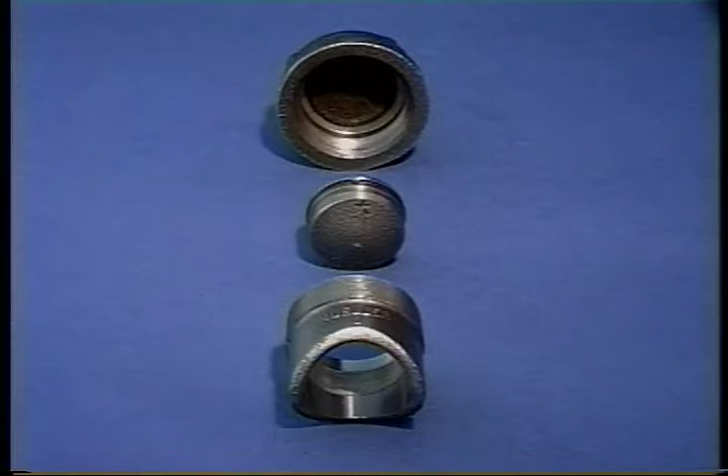This fitting consists of the one-piece forged steel body, plus an O-ring sealed completion plug and a cast iron completion cap. The H-17190 fitting is available in 6 sizes: 3/4 inch, 1 inch, 1 1/4 inch, 2 inch, 3 inch, and 4 inch. All sizes are rated at 250 psi maximum working pressure, except for the mechanical joint style, which is rated at 125. During the stopping off operation, all sizes are rated at 100 psi.

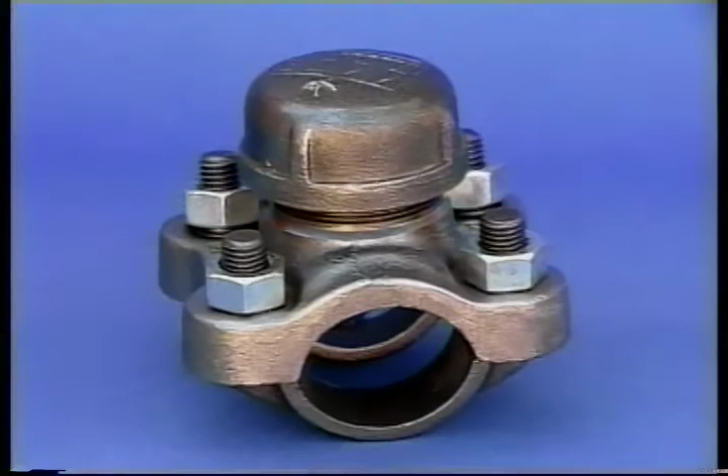The 3/4 inch, 1 inch, and 1 1/4 inch fittings have a brass completion plug, and the 3 larger sizes have a steel plug. Mueller also offers 3 variations of this one-piece, low-pressure fitting. The H-17191 mechanical joint fitting is ideal in emergency situations, or when no welder is available. It's available in 2, 3, and 4 inch sizes, and it's rated for 125 psi working pressure and 100 psi during the stopping off operation.

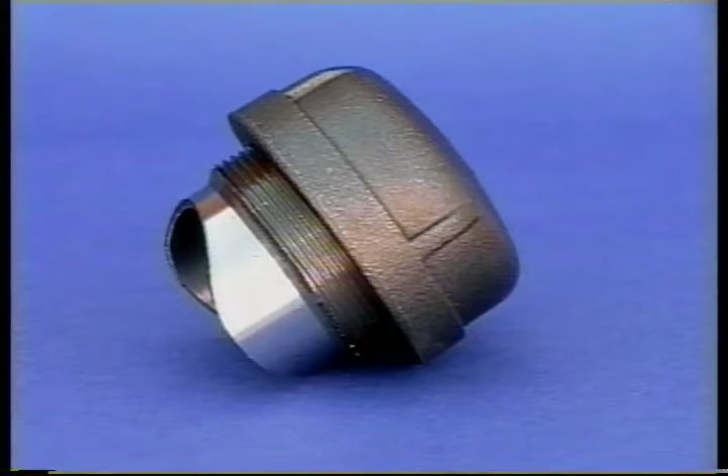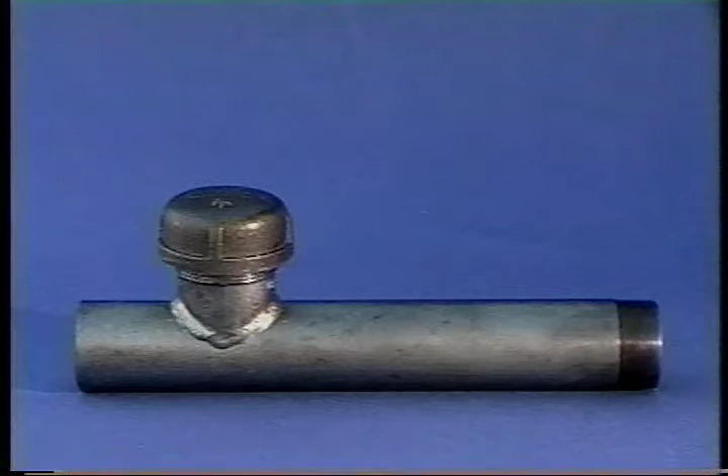The H-17192, for use with thin wall steel pipe, is offered in 3 and 4 inch sizes. It has a maximum working pressure of 250 psi and 100 psi during the stopping off operation. The H-17193 lateral extension stopper fitting requires 2 machines, one to drill and one to stop. It's available in 2, 3, and 4 inch sizes. This variation also has a maximum working pressure of 250 psi and 100 psi during the stopping off operation.

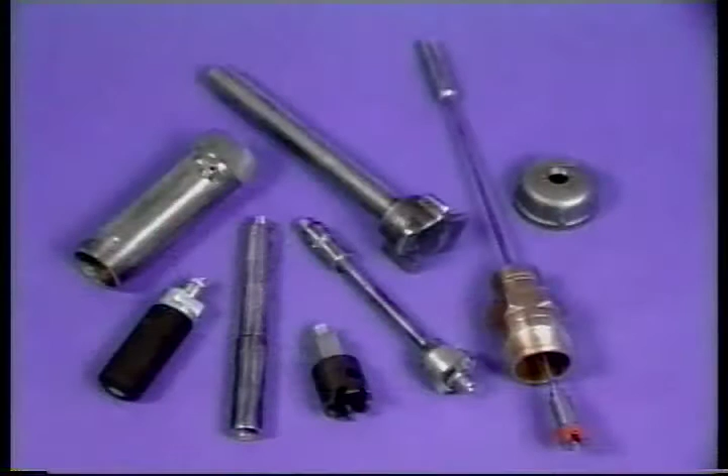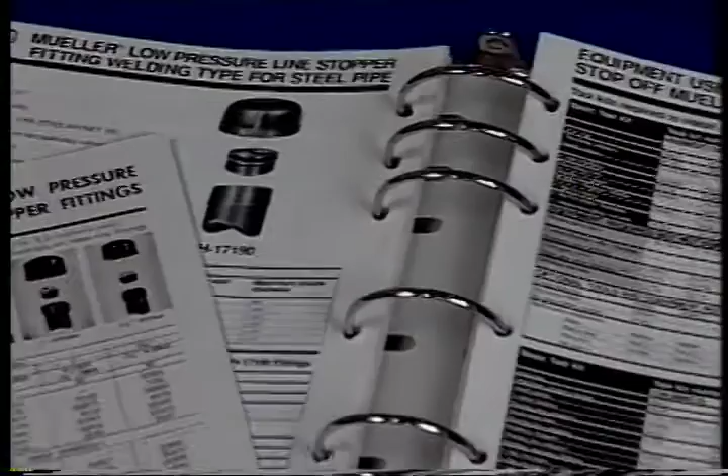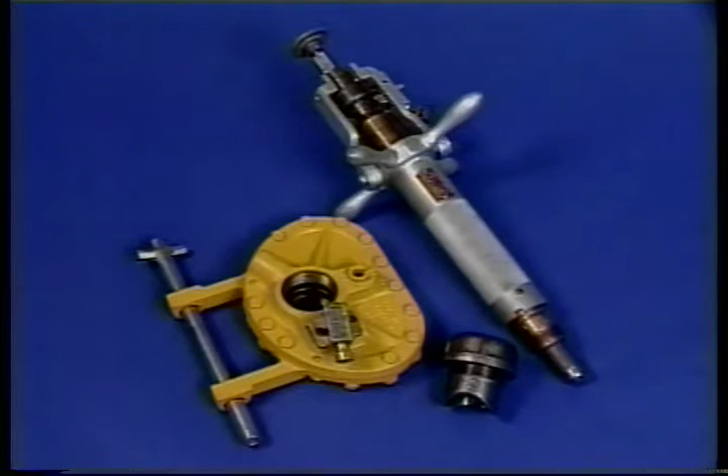Before we begin any procedure, the proper toolkit must be selected. To do this, 3 things must be known: the size and style of the fitting, the drilling machine being used, and the type of valve or control chamber that will be used. Knowing this, the appropriate toolkit can be selected from the Mueller Gas Products catalog or the operating instructions manual. In this demonstration, we will be working on the Mueller 2-inch H-17190 fitting using the E5 drilling machine and the H-10917 slide gate valve. The same basic procedures are used for the other sizes and styles of fittings in this series.

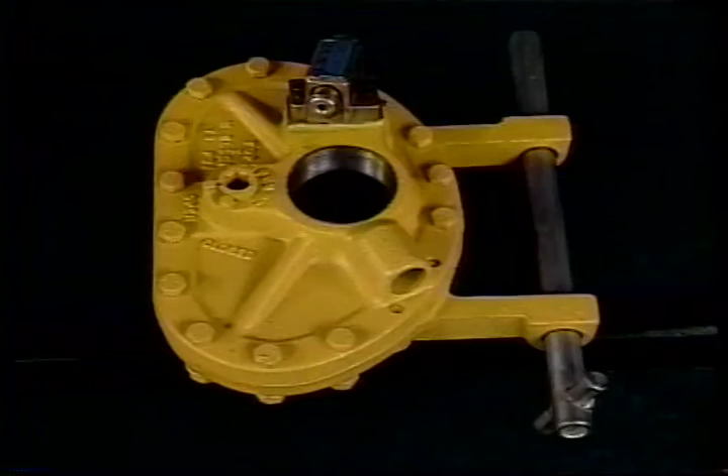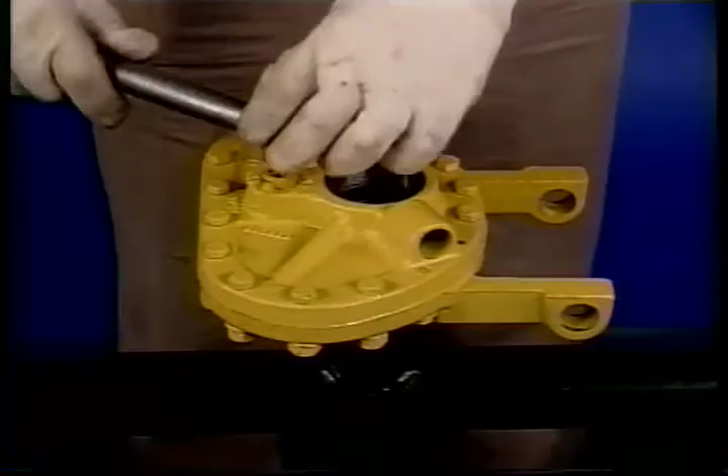The slide gate valve, or SGV, consists of the following parts: 2 ductile iron body halves, top and bottom, that are bolted together, 1 stainless steel disc assembly, 1 O-ring seal, and 1 bypass relief valve, plus a multifunctional handle that is used to carry the gate valve, open and close the hex operating nut, and tighten the valve to the fitting. All of these SGV parts are field replaceable. The valve is available in 2-inch, 2.5 inch, 3 and 4 inch sizes, and is pressure rated at 275 psi.

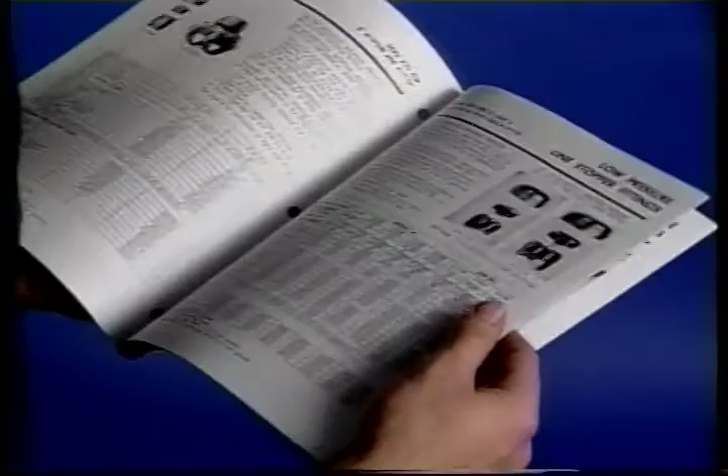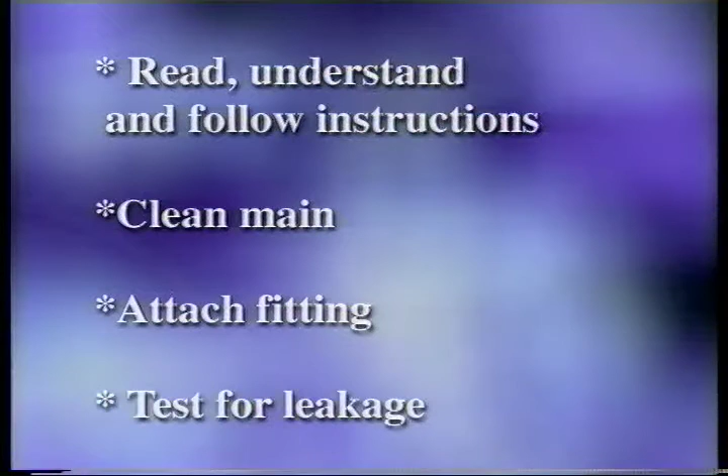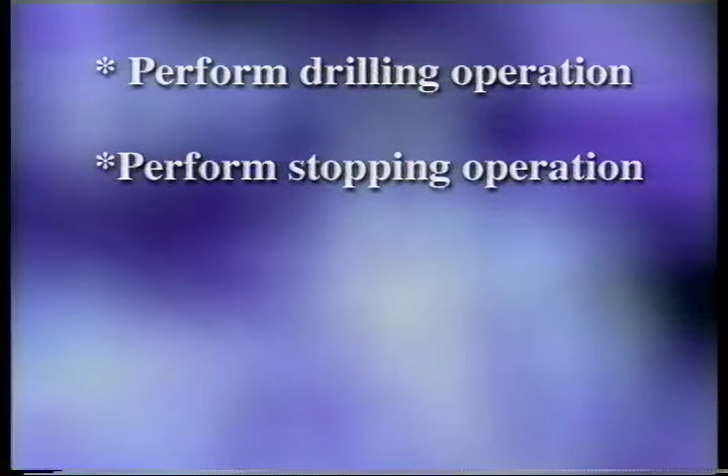Let's begin with the installation of the 2-inch H-17190. Mueller recommends the same 8 basic procedures for installing fittings as it does for installing tees. 1. Read, understand, and follow the instructions in the operating manual. 2. Clean the main. 3. Attach the fitting. 4. Test for leakage. 5. Perform the drilling operation. 6. Perform the stopping operation. 7. Insert the completion plug. 8. Install the completion cap.

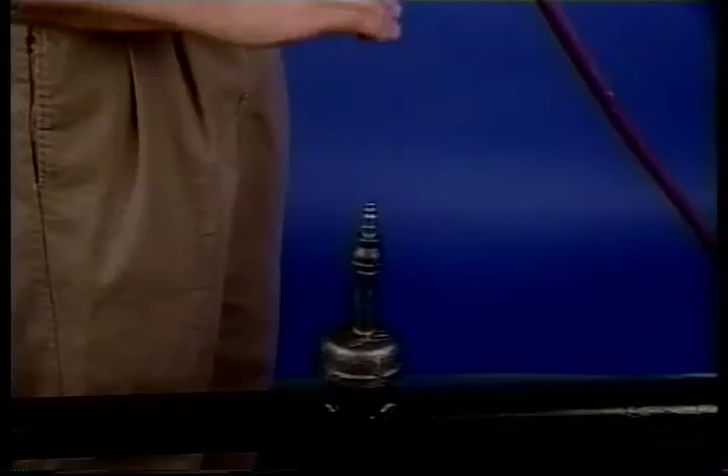Following these steps, first, thoroughly clean the main of dirt and debris at the point of installation. Before any welding is done, be sure to remove the completion plug so as not to damage the O-ring. Then, attach the test cap. Next, weld the fitting, aligning it vertically on the main. Once the weld has air-cooled, test for pressure tightness. Now, attach the 2-inch slide gate valve to the fitting.

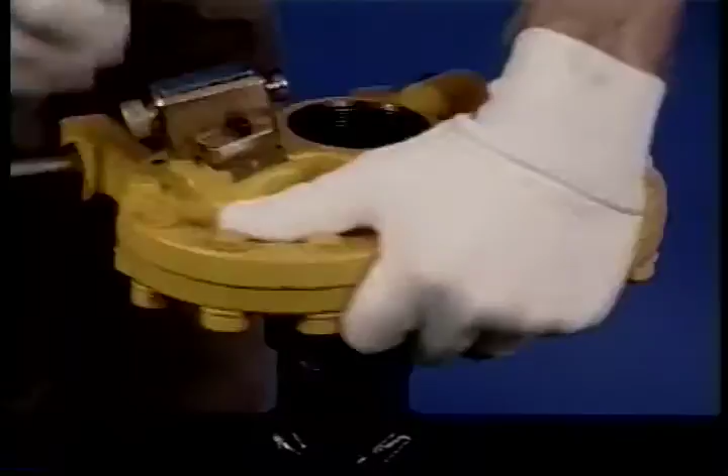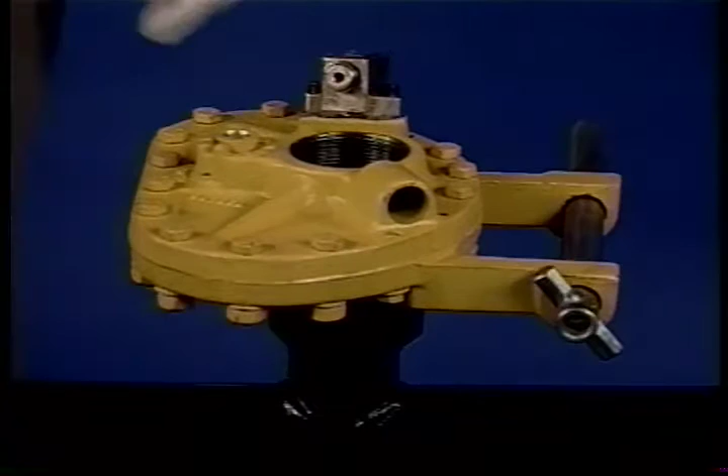Mueller recommends that the optional adapter bushing be used with the SGV because it extends the laying length of the SGV, making it equal to the length of the bronze gate valve, with no adjustments for travel required. The bushing also protects the bottom ductile iron threads on the SGV when it is tightened to the steel fitting. When the bushing wears down, it can be easily replaced at less cost than replacing the lower body of the slide gate valve. Next, prepare the E5 machine for the drilling operation.

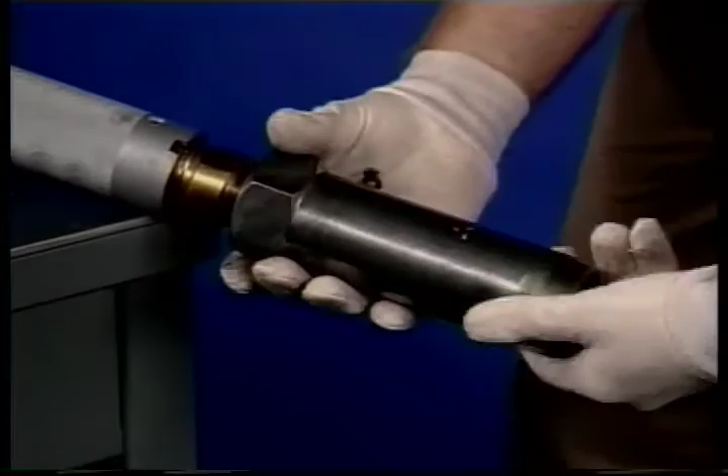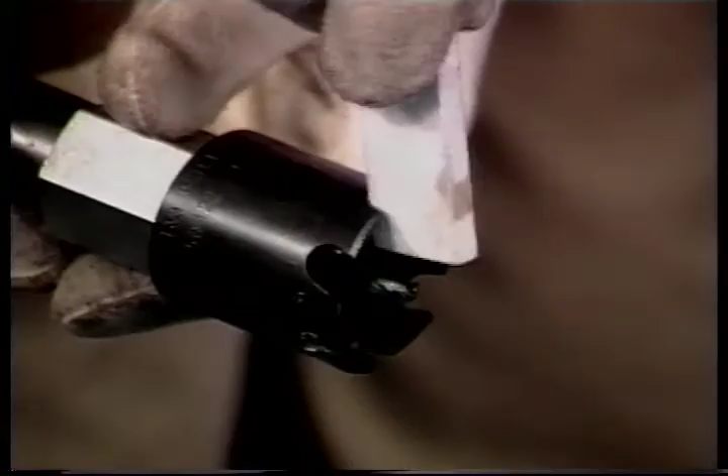Attach the proper machine adapter nipple to the machine with gasket seal in place. Make sure the bleeder valve on the adapter is closed. Attach the shell cutter and pilot drill to the tool holder. Then thread the entire assembly to the boring bar of the E5 machine. Hone the leading edges of the shell cutter and pilot drill. Then coat them both with Mueller cutting grease.

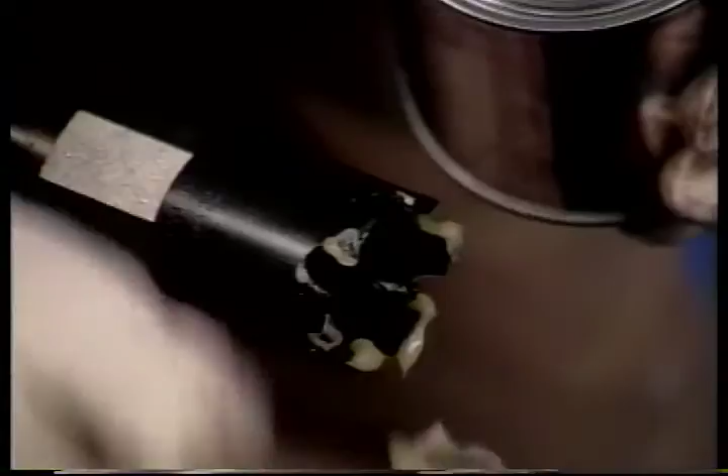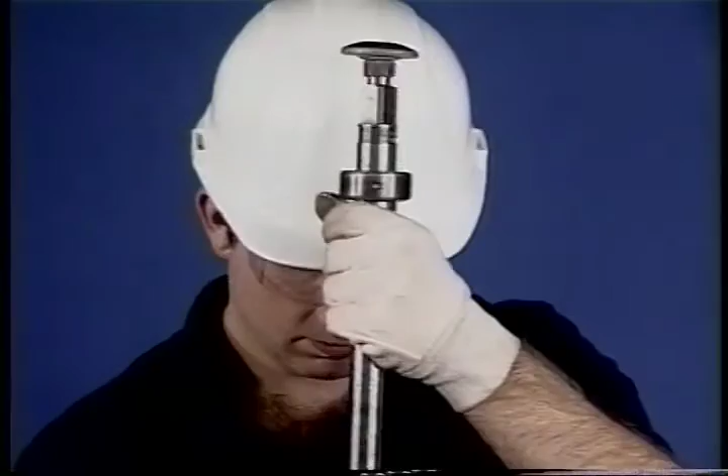Check the slide gate valve to make sure it's open. Then retract the tools into the machine adapter and thread the entire unit onto the SGV, holding up on the boring bar. This will prevent the pilot drill from dropping onto the main and possibly damaging the drill or shell cutter.

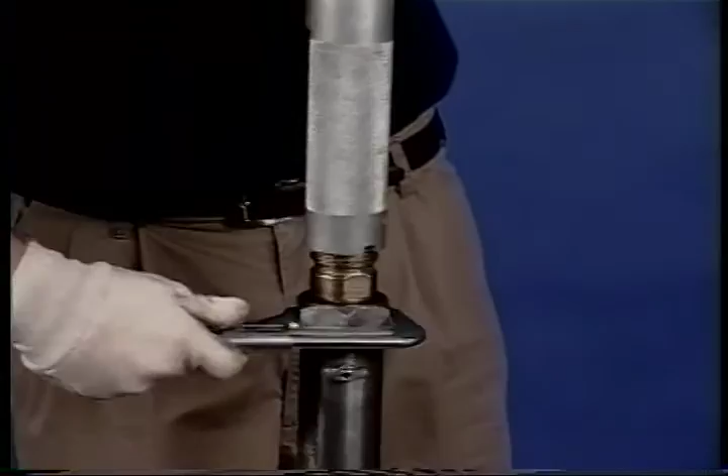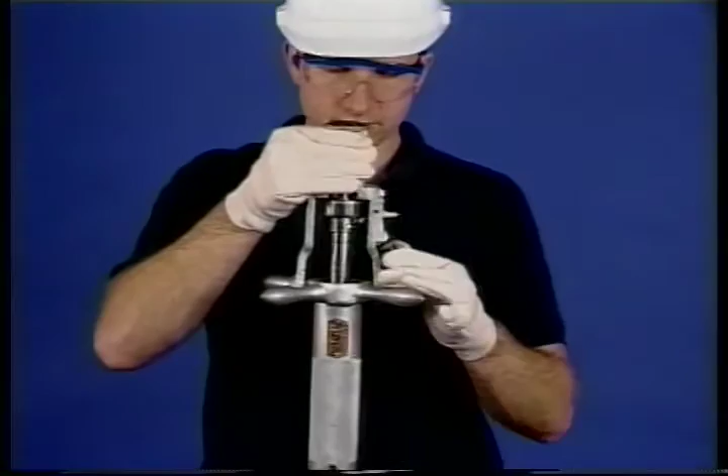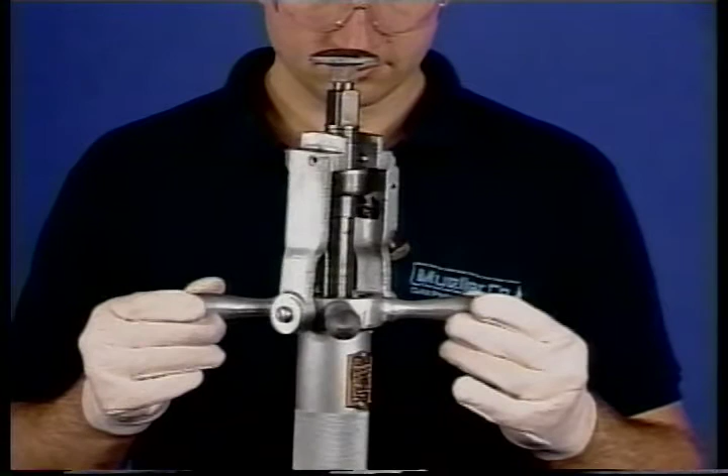Make sure the bypass relief valve is in the bypass position and gently lower the boring bar until the pilot drill touches the main. Lock the yoke assembly to the boring bar and back the pilot drill just off the surface of the main. This will keep the drill from starting in a bind. Lock the ratchet handle in the forward drive.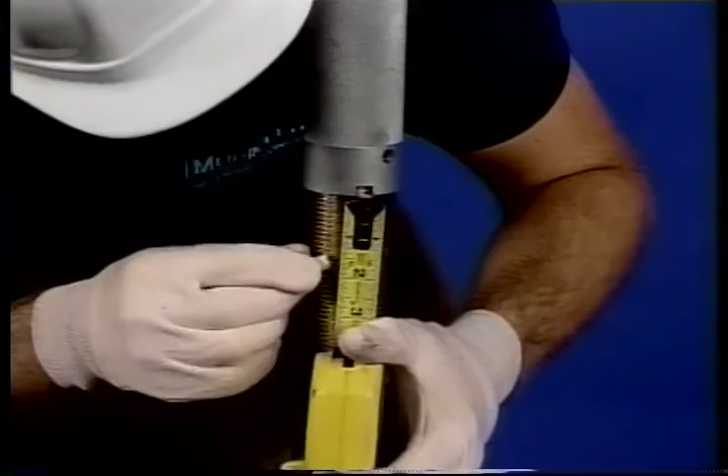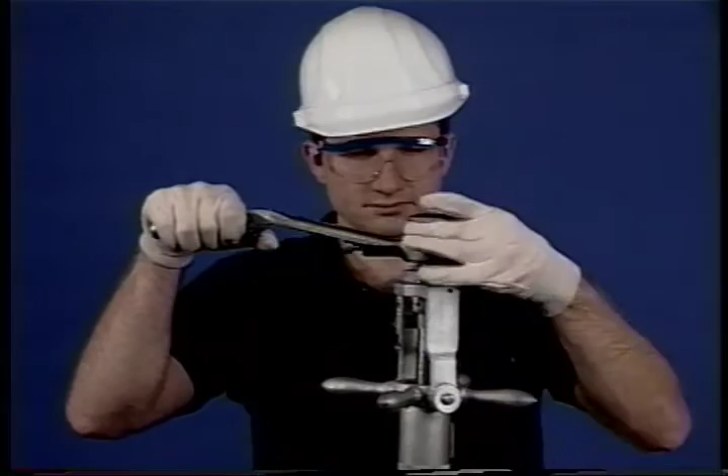According to the blue operating manual, the travel for a 2-inch H-17190 fitting is 1 3/8 inch. Measure 1 3/8 inch down from the yoke and mark this point on the machine body. The cut can be made by hand or with the H604 air power operator.

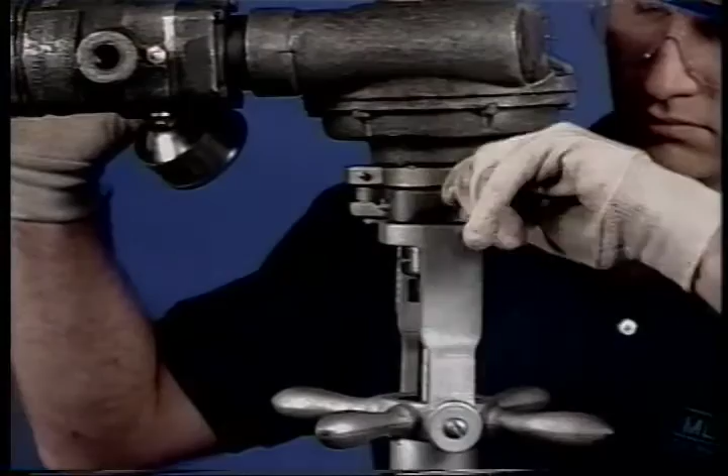To use the air motor, remove the ratchet handle and place the inner chuck of the motor onto the square drive of the E5 drilling machine. Now tighten the outer clamp onto the raised neck of the yoke. Before attaching the air hose to the throttle connection, be sure to blow down the line. This will remove any dirt that might clog the air filter.

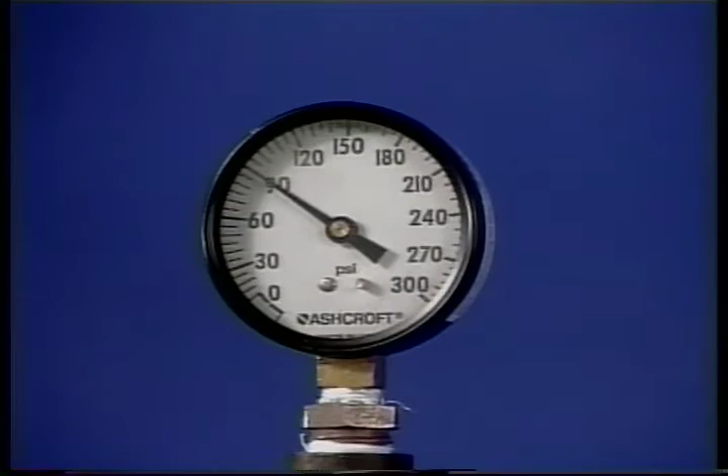We also recommend having an air gauge at the throttle to monitor air pressure and an inline oiler to assure proper lubrication. Operate the throttle at the recommended 90 psi pressure. This will automatically feed the shell cutter at the 10:1 cutting ratio recommended for the E5 machine. This is equivalent to 10 full turns of the ratchet handle to 1 full turn of the yoke handle. This is the optimum advancement of the boring bar and shell cutter.

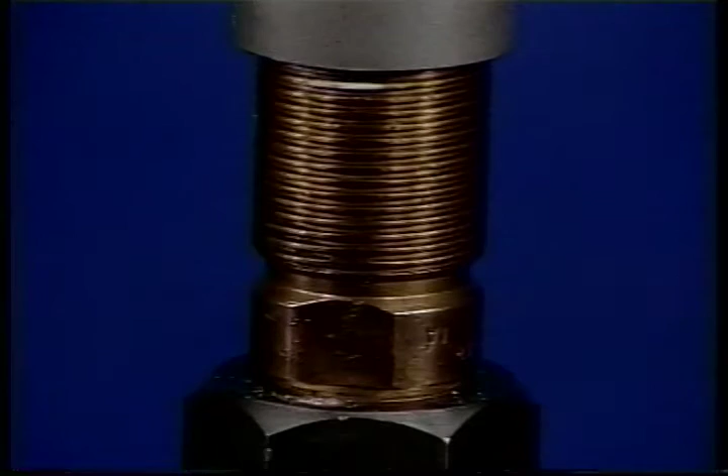If the cut is done by hand, apply a light, even feed to both the ratchet handle and the yoke. If the yoke is fed too fast, it will force the shell cutter into the main and risk breaking the pilot drill or cutter teeth. Continue the cutting operation until the feed yoke reaches the 1 3/8 inch mark on the body.

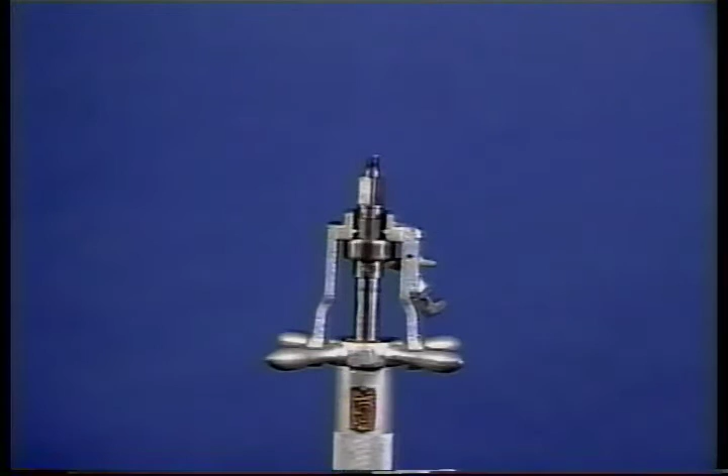If the cut is performed with the air motor, release the throttle and manually rotate the yoke clockwise. If it turns easily, the cut is complete. If it doesn't turn easily, run the air motor for one turn, then stop and check again. Continue this process until the cut is complete.

Once drilling through the main has been completed, the machine will be under full line pressure. Do not disengage the yoke. This could allow the boring bar to move upward with great force and possibly cause bodily injury. Now, turn the yoke assembly in a counterclockwise direction, backing the shell cutter out of the main and the fitting all the way, bringing the coupon with it.

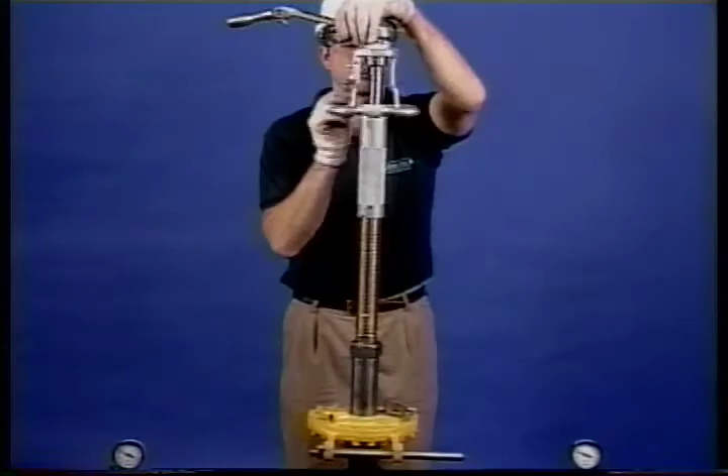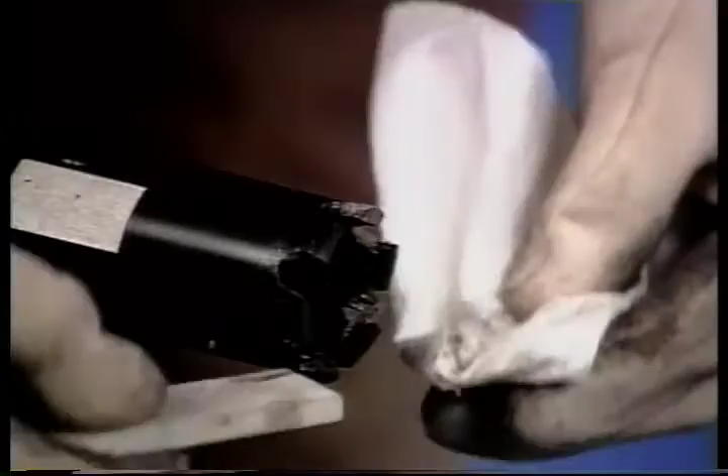Unlock the pivot arm. Disengage the yoke assembly, and, while controlling the piston action, raise the bar to its rearmost position. Close the slide gate valve. Holding up on the boring bar, relieve the pressure through the bypass relief valve. Remove the machine and adapter from the SGV. Clean and hone the shell cutter and pilot drill to make them ready for their next use.

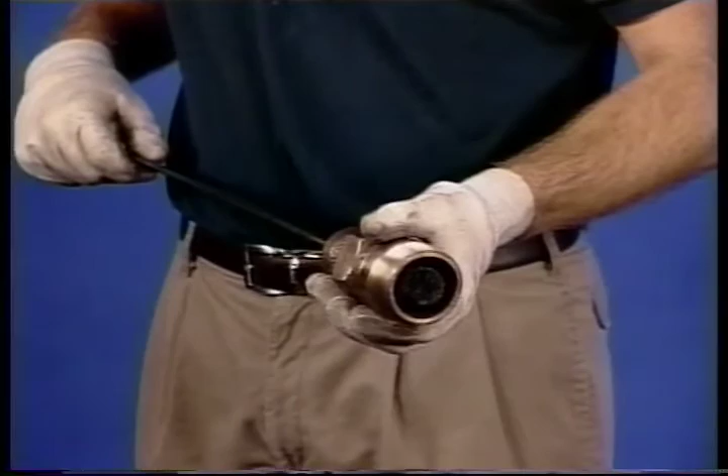Before stopping off this fitting, clean away the metal chips from inside the bottom of the pipe. This is one of the most critical steps in the entire operation, since the bottom of the pipe is used to set the stopper and achieve a positive stop-off. For cleaning, use the chip sweeper. Our standard sweeper consists of a wire brush on the end of a rod, which is operated through a ball bearing arrangement. It has a brass stuffing box, which is O-ring sealed.

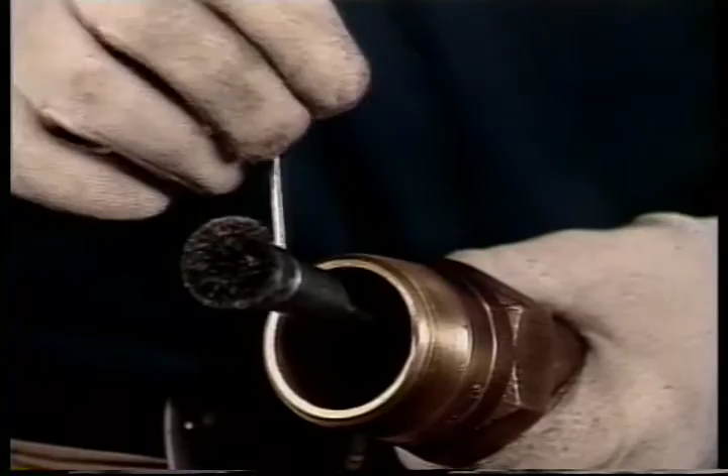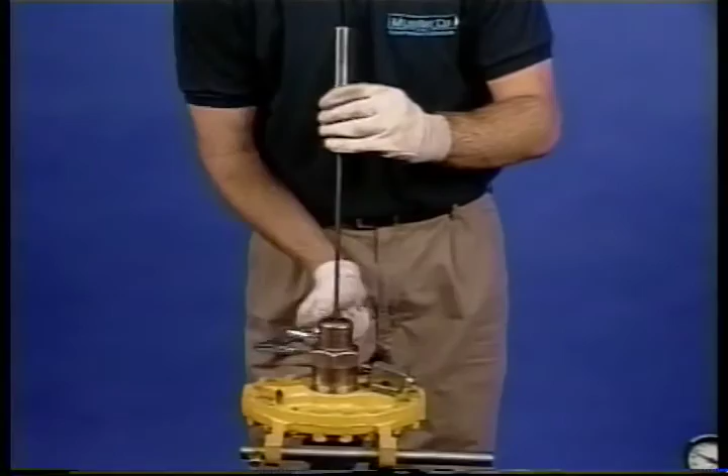In this demonstration, we will use a new sweeper option, a magnetic chip remover that is now available as a replacement for the standard brush-style sweeper. It's ordered separately and easily replaces the brush on both new and existing chip sweepers. Thread the chip sweeper to the slide gate valve. Hold up on the rod handle. Place the bypass relief valve in the bypass position and open the SGV.

Simply lower the magnet to the bottom of the pipe. Raise it slightly off the bottom as you move it over the entire area beneath the cut, collecting the chips in the process. We recommend doing this twice, cleaning the chips from the magnet between procedures. Now, raise the rod to the uppermost position and close the SGV. Relieve the pressure and remove the chip sweeper.

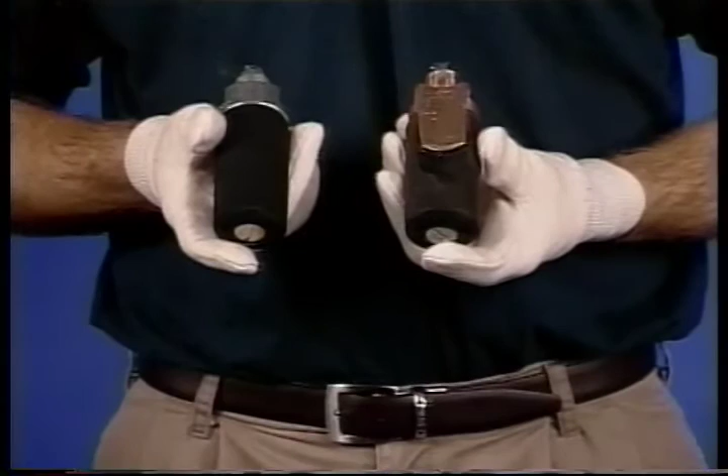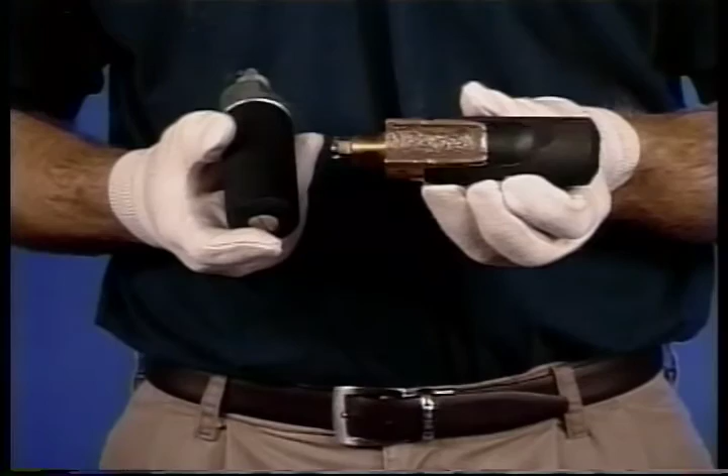We are now ready to perform the stopping off operation. A solid rubber stopper will be used. In situations where continuous gas flow downstream is required, Mueller offers bypass rubber stoppers for use with this fitting. We will cover those later in this video.

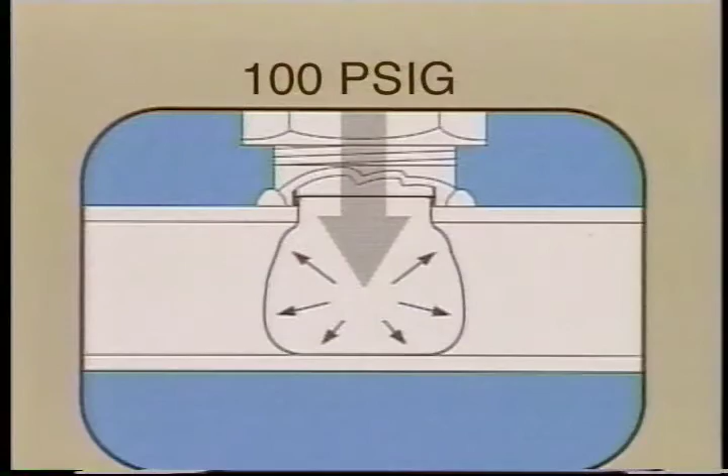Here, using the solid stopper, we will compress our stopper against the bottom of the main, in effect expanding it to fill the inside of the pipe to stop gas flow. In order for the stopper to compress correctly, the proper tool must be used to hold the stopper. The holder needed here is hollow, allowing the stopper shaft to rise freely as the stopper is compressed. A solid holder used here could bend the shaft, damage the stopper, and prevent a complete stop-off.

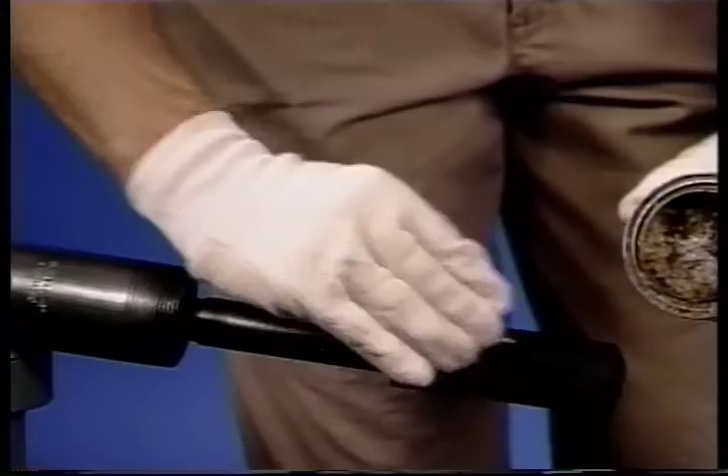Attach the 2-inch rubber stopper to this hollow holder and thread the entire unit to the boring bar of the drilling machine. Apply Mueller rubber stopper lubricant to the stopper, but keep the bottom of the stopper dry. This will create more friction between the stopper and the pipe and not allow the stopper to move out of the optimal position. Do not use other lubricants which may attack the rubber and shorten its life. Retract the stopper into the machine and adapter.

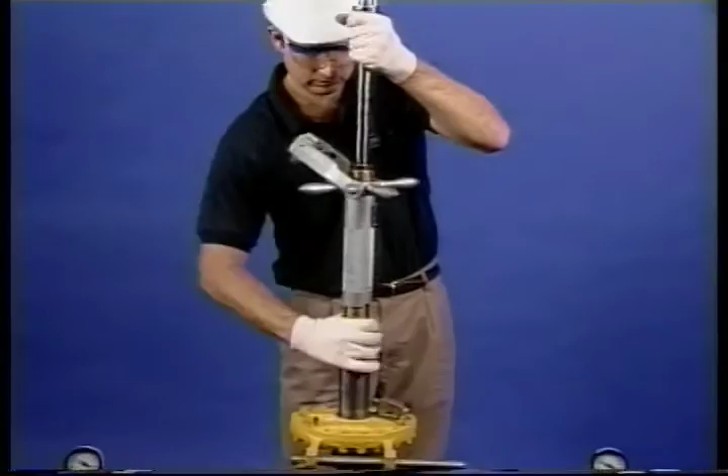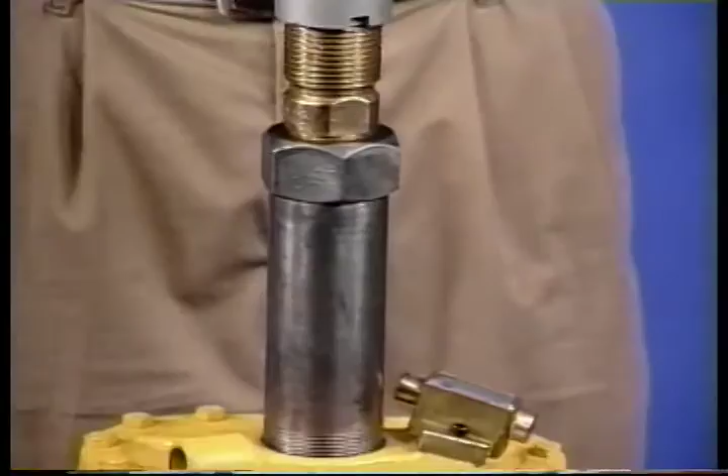Hold up on the boring bar and attach the machine to the slide gate valve. Tighten the unit wrench tight. Place the bypass relief valve in the bypass position and open the SGV. Lower the stopper through the fitting until it rests on the bottom of the main. Engage the yoke assembly, then lock it to the boring bar.

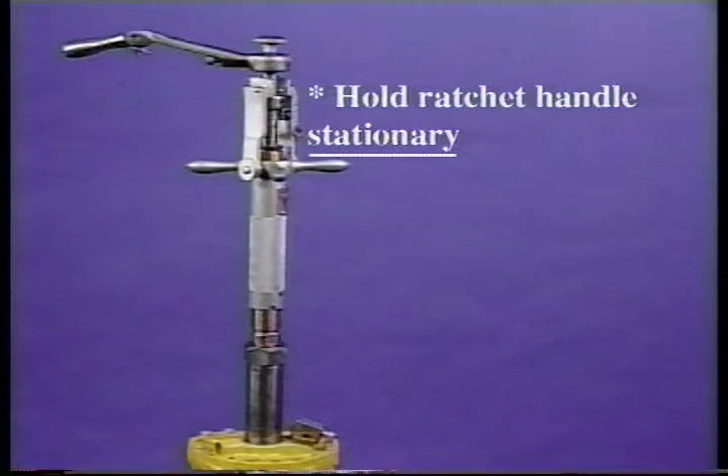The yoke will be used to expand the stopper, so the ratchet handle must be held stationary. If it's allowed to turn, the stopper will also turn and might be damaged by a burr or the sharp, freshly cut edge on the main. According to the Mueller operating manual, 8 to 10 full turns of the yoke should be sufficient to effect a positive stop-off with a 2-inch solid rubber stopper. The maximum number of turns is 14, or 1 3/4 inch of travel. Mueller recommends that you count the turns and mark the travel. Overexpansion of the stopper could result in damaging it, or not being able to relax and remove the stopper.

Rotate the yoke 1/2 turn at a time, pausing after each turn. This will allow the rubber to expand naturally. Continue turning the yoke in this manner up to 8 turns. Then open the purge valve on the main and test for stop-off. If stop-off is not complete, rotate the yoke until a stop is achieved, making sure not to exceed the 14 maximum turns or the 1 3/4 inch distance. Now, proceed with the repair, replacement, or relocation operation. Keep in mind that the minimum welding distance for the 2-inch stopper is 8 inches.

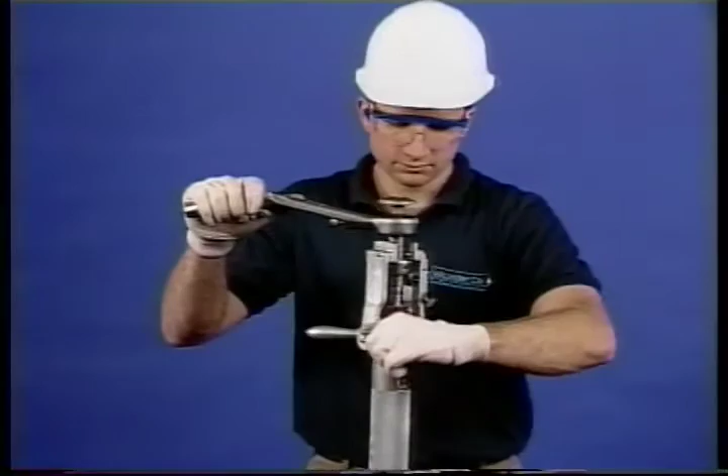To relax and retract the stopper once work is completed, no equalization is required. This style of stopper is self-equalizing, which means that as we relax the rubber, the gas will escape around it, equalizing the pressure on both sides of the stopper. Reverse the ratchet. Turn the yoke counterclockwise, 1/2 turn at a time, pausing after each turn. Rotate the same number of turns as were used to expand the rubber. This will ensure that the stopper is now the same size as it was before expansion, and that you will be able to remove it from the fitting.

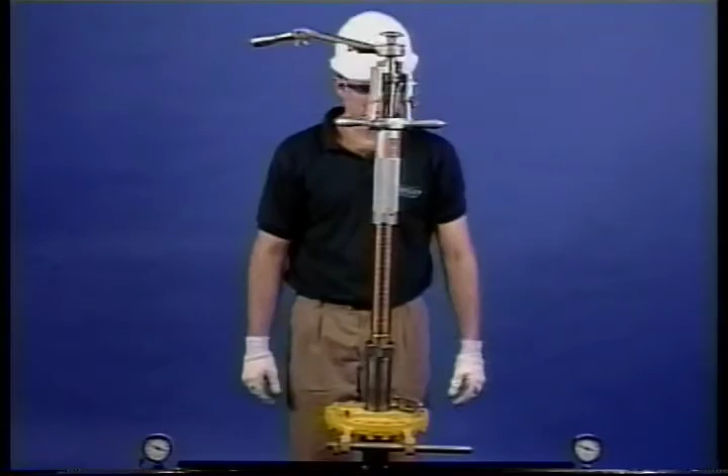Turn the yoke in the counterclockwise direction to retract the boring bar to the rearmost position. Close the gate valve and move the bypass relief valve to the relief position, bleeding the excess gas. Remove the drilling machine and tools from the slide gate valve. Unthread the stopper and holder from the boring bar, and wipe off the stopper.

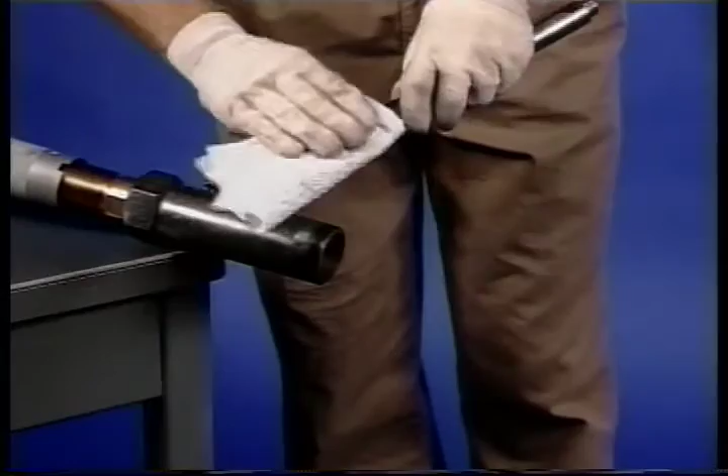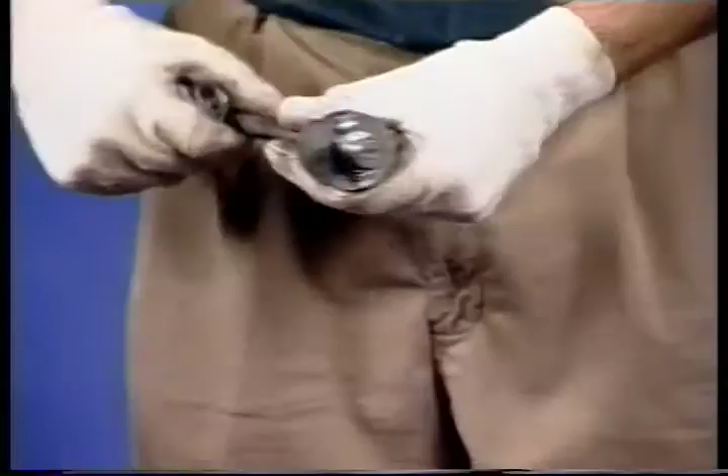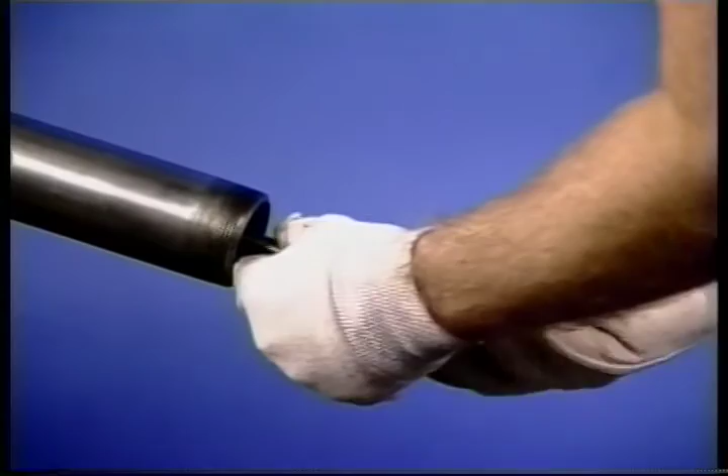We are now ready to install the completion plug and finish this operation. We will be using the EZ Release Inserting Tool. First, attach the top nut of the inserting tool, wrench tight, to the boring bar. Then, attach the machine adapter. Thread the lower shank into the completion plug as far as it will go. Then back up the shank until the forks fall into the slots on the plug, and attach the unit to the nut, hand tight. Lubricate the O-ring on the completion plug.

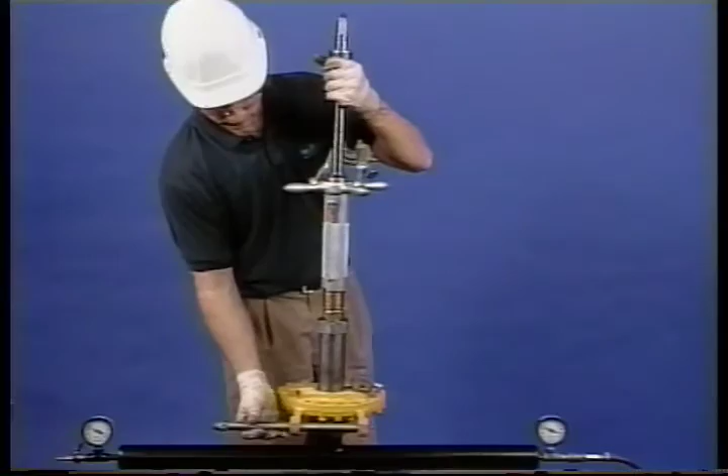Retract the tool into the adapter and attach the machine to the slide gate valve. Hold the boring bar up, keeping your face and body clear of the upper end of the boring bar, which will be under full line pressure during the next part of the procedure. If you lose your grip on the boring bar, it could raise forcefully and cause bodily injury. Place the bypass relief valve in the bypass position, equalizing pressure above and below the gate valve. Then open the gate valve.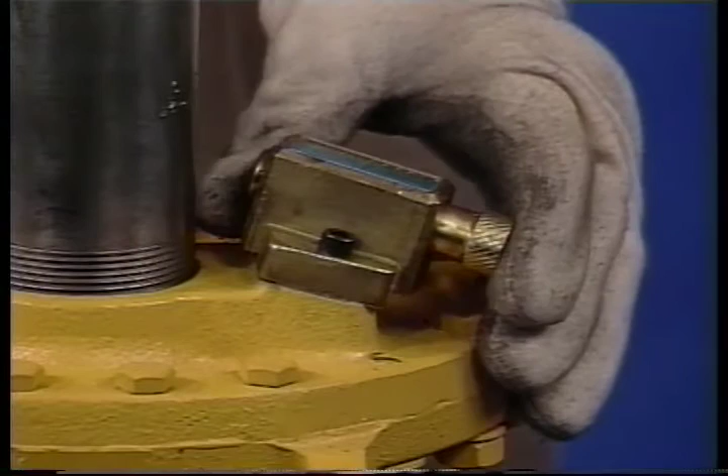Check for plug tightness by placing the bypass relief valve in the relieve position. If it continues to blow gas, tighten the completion plug some more. When it's secure, reverse the ratchet dog, pick up the slack, and strike the ratchet handle. This will separate the upper and lower sections of the easy release inserting tool.

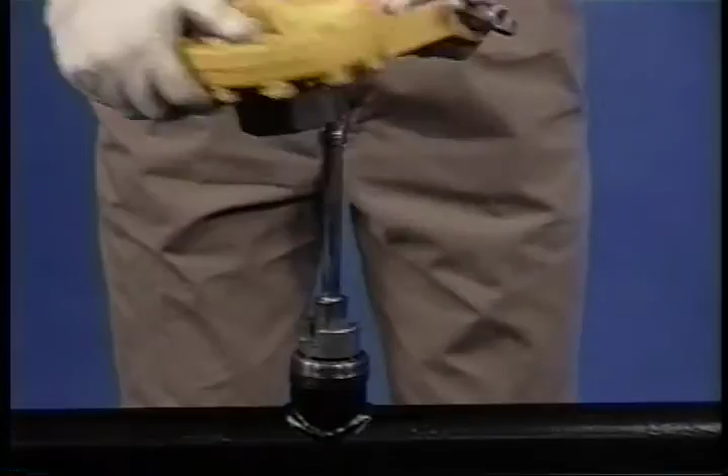Remove the machine from the slide gate valve and detach the adapter and nut from the machine. Now, remove the SGV from the fitting and unthread the lower shank of the inserting tool from the completion plug. Use the completion plug wrench to secure the plug into the fitting.

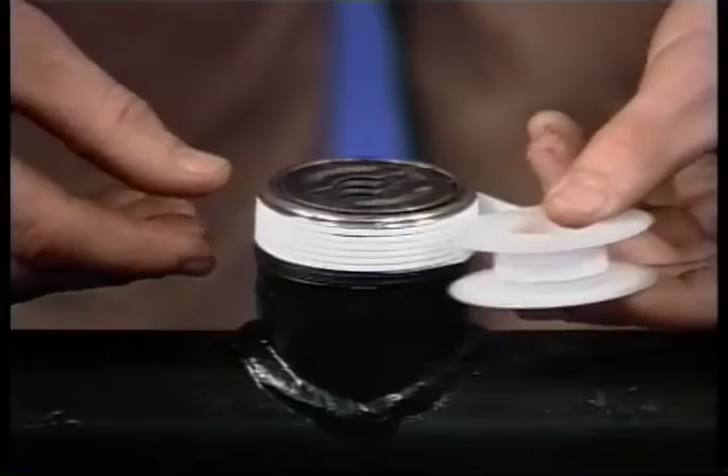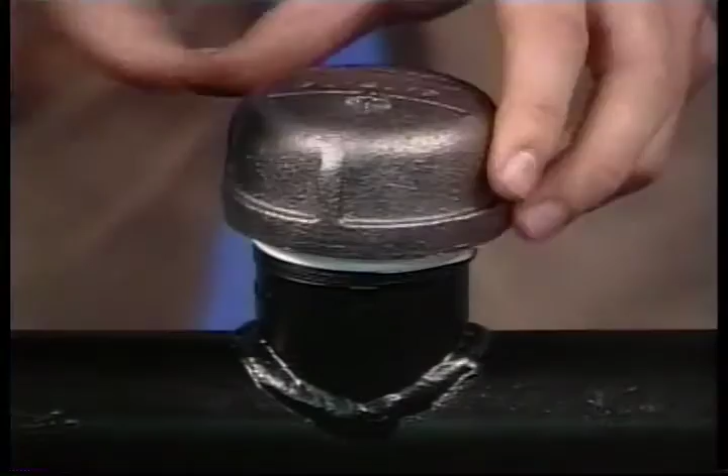Apply non-hardening sealant to the outside fitting threads and attach the completion cap, wrench tight. This fitting is double sealed and will allow access to the main if needed in the future.

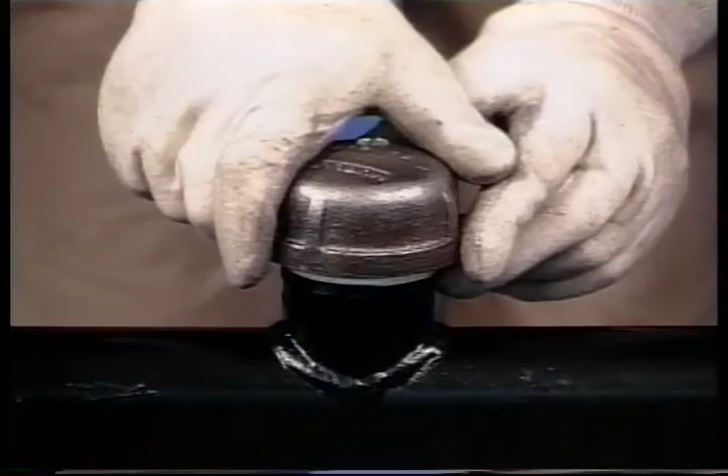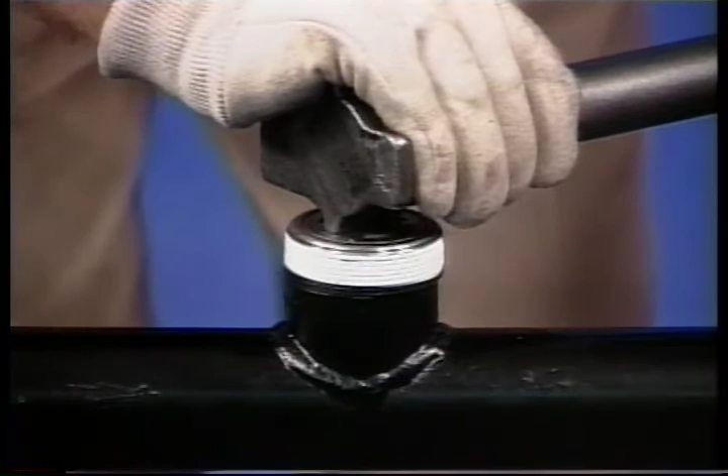To access the main at a later time, start by unthreading the completion cap slowly. Make sure the completion plug is securely in place. Using the completion plug wrench, try to tighten the plug. If it won't tighten, the seal of the plug is safe to open, without the risk of being ejected out of the fitting and possibly injuring the operator. It's okay to break loose the completion plug by turning the wrench counterclockwise.

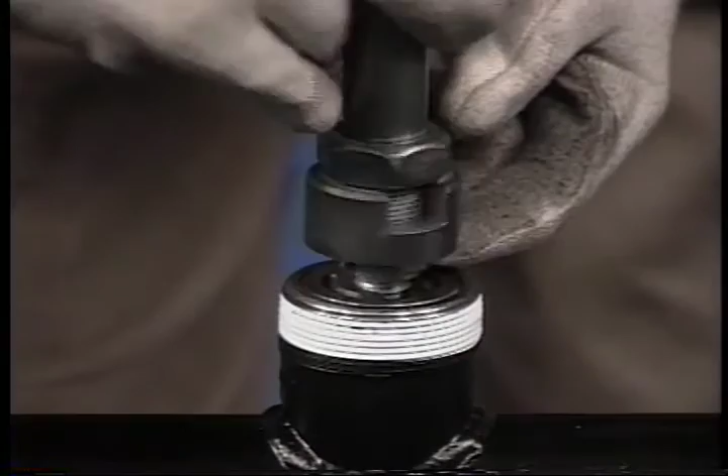Attach the extracting tool to the completion plug. Thread it down until it bottoms out, then back it up until the forks drop into the plug slots. Tighten the lock nut to secure the forks to the plug. Attach the slide gate valve to the fitting and place the bypass relief valve in the bypass position. Thread the E5 machine and adapter onto the slide gate valve.

Lower the boring bar onto the extracting tool until the tool threads contact the left-hand threads that are inside the end of the boring bar. Ratchet the E5 handle counterclockwise. This will mate the left-hand threads of the extracting tool with those on the boring bar. Continue ratcheting in the counterclockwise direction to unthread the plug from the fitting.

Once the plug is free, the pressure will force the boring bar up, so be sure to maintain control of the piston action, keeping your face and upper body clear of the boring bar to avoid possible bodily injury. Extend the bar to the rearmost position and close the gate valve. Holding the boring bar up, expel excess gas by putting the bypass relief valve in the relieve position. Remove the machine with the extracting tool and plug from the valve. Then proceed with the repair, replacement, or relocation operation.

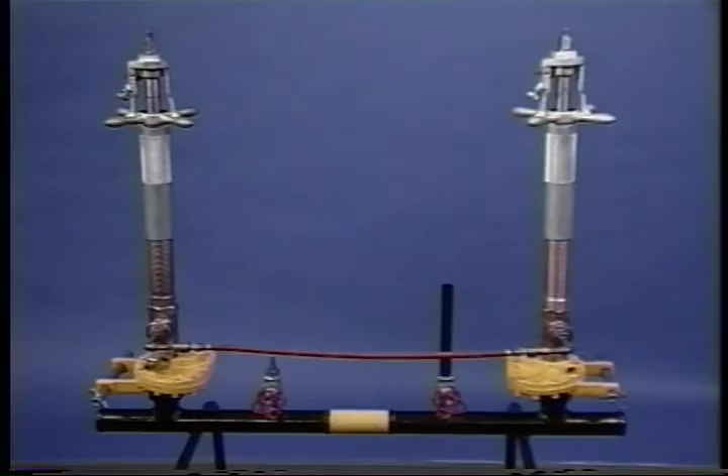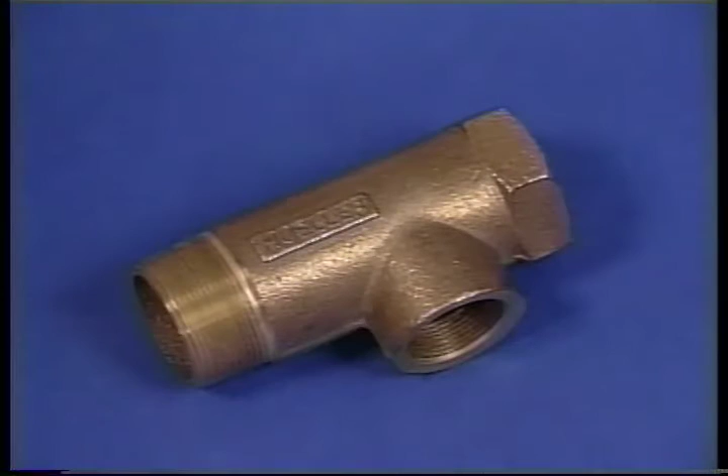During the stopping off procedure, reference was made to Mueller bypass rubber stoppers for use where a continuing flow downstream is required. These are designed to work with the H-17190 series fittings and the E5 or D5 machines. For this operation, we will need two of the following: bypass stoppers, machines, and adapter nipples. Each stopper has a cavity on one side of the body to direct gas flow up through the machine. The machine adapter has a threaded bypass port on one side of the body, where a temporary bypass line can be attached.

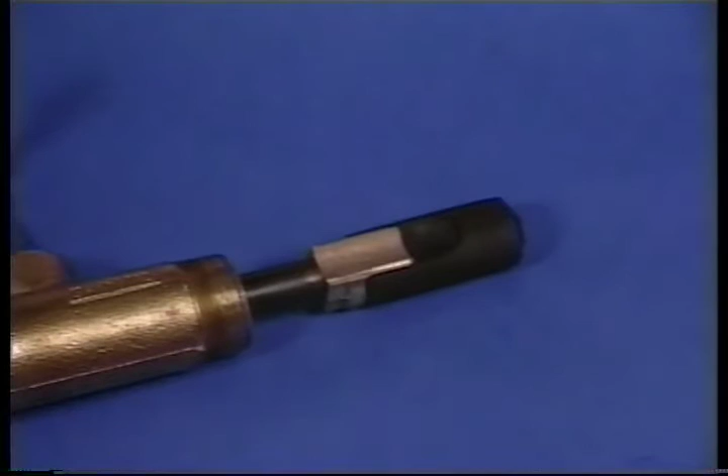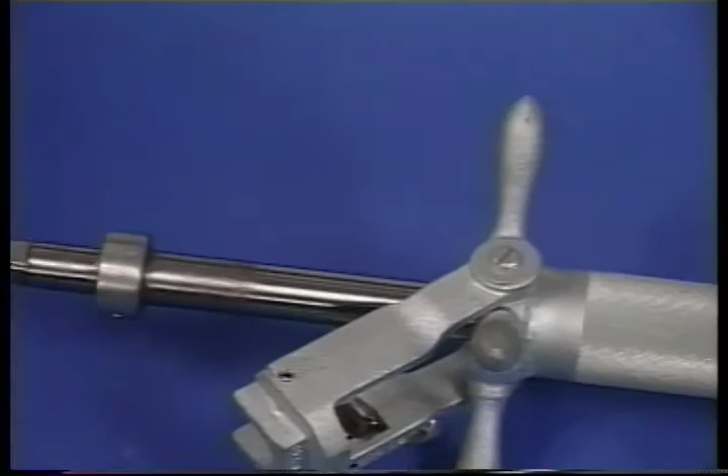It's important to remember that the bypass groove on the stopper must be aligned with a part on the boring bar that will be visible during the stopping off operation, so that the stopper is installed in the proper position to redirect the flow. This can be done by marking the thrust collar of the boring bar. Once the machines are in place on the gate valves and the bypass line attached, line up the marks that show the position of the bypass grooves so that they're pointing away from the section of pipe to be isolated.

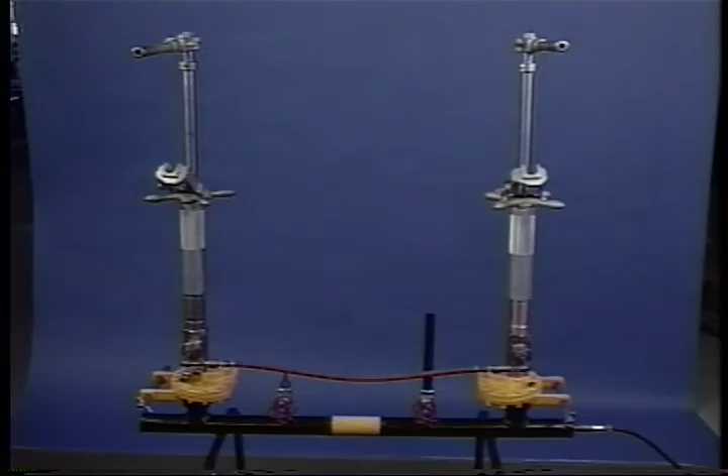Lower the upstream stopper and expand it. Then lower the downstream stopper and expand it. When stop-off is achieved, purge out the isolated section and proceed with repairs. We have successfully completed the proper procedures for the Mueller one-piece low-pressure line stopper fittings with no blowing of gas to the atmosphere using the Mueller no-blow method. This completes our training video on the installation or repair procedures using Mueller's H-17190 series one-piece low-pressure line stopper fittings.